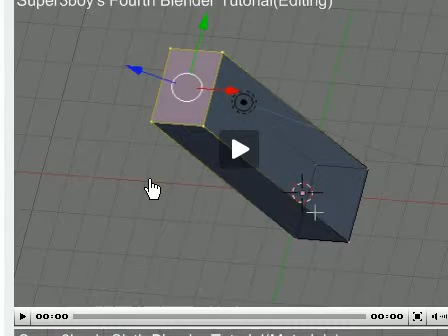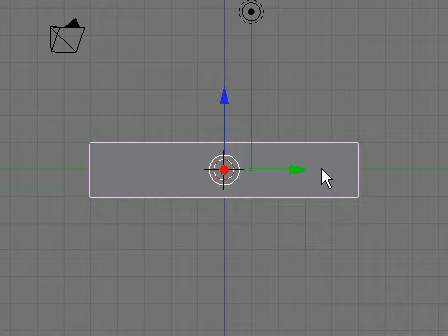So let's go ahead and have fun with some armatures. Here I am in the Blender 3D software, and we're actually going to use our default cube today. What we're going to do is go View, Side, or Numpad 3, hit the S key, hit Y, then 5, scaling this 5 times its size on the Y axis. Now we have a nice little long rectangular thing here.

We go down and want to get in the middle to the left of it. Click right about there, hit Shift S, and you can snap things to locations like cursor to grid, which is what we're going to do to make everything more exact. Hit space, add mesh, space, add armature, and you can see a little tiny thing pop up on the side here. We're going to go into wireframe mode by hitting the Z key to make everything a little easier to see.

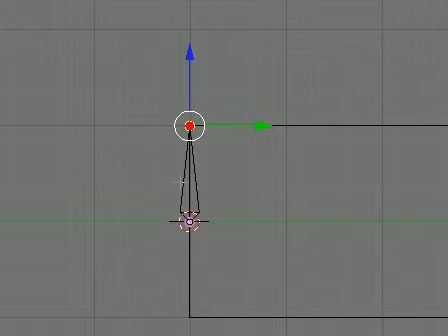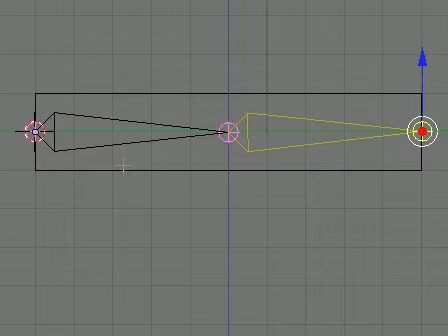Then you hit the G key, and we're going to move it to this blue line, which is the center. We hit the E key to extrude, and get it on the edge of our rectangle here. So what I did was add an armature in edit mode, grab it across, then extrude, so we have two little bones here.

After we do that, we go down to our toolbar and select these options: X-axis mirror, X-ray, and auto IK. Now, auto IK really doesn't matter, but I just like it. It gives it more of an arm feel.

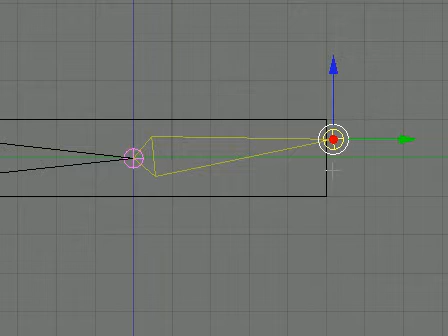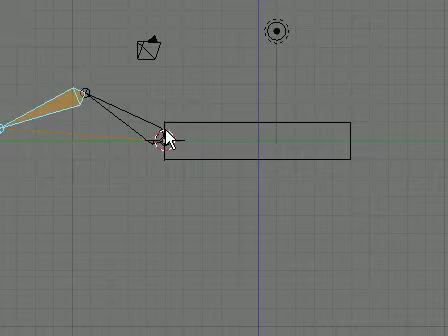If we go down to the different modes and go to pose mode, you can see it gives it a little constraint. It's a bit sporadic now because I'm just trying to keep it in view, but you can see it moves more like an arm when I have it on auto IK. So you can play around with that.

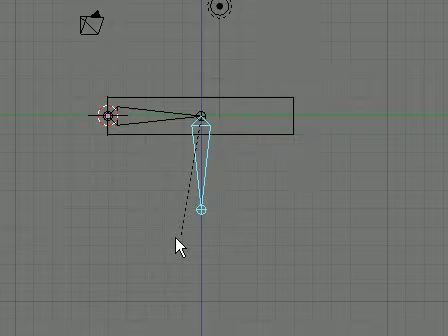If I left click and undo with Control Z, if I undo auto IK and go back into pose mode, it'd just be kind of static. I'm using the G key, you select these like any other objects. After that, I'm going to select auto IK back because I kind of like it for this tutorial.

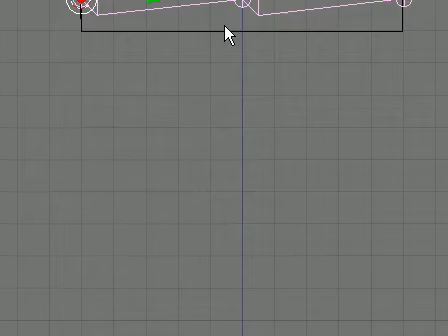Then we go back into edit mode, I hit tab, go to object mode, and hit draw names too, so you can see the names of the things. We're in object mode. We want to select the rectangle here. This is just a cube that we made a little bit bigger, as you can see as I free rotate with Alt.

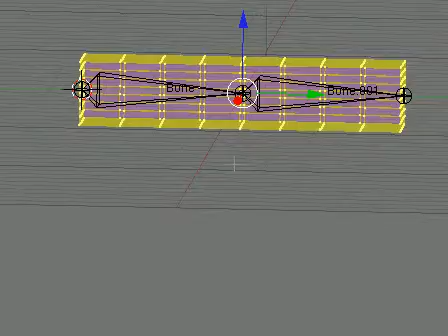Hit W, subdivide it 3 times, I guess that would be good enough. Go back to the side view, and we go down here. We create a vertex group, new, group, set assign. Remember, everything has to be selected - all these vertices - you can select everything with A or deselect with A.

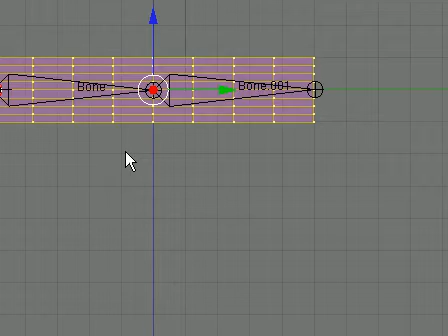So everything's selected, assign. Then from there, we want to go tab, get into object mode, add modifier, armature. Usually the armature is named armature, so that's the object, we just paste it in here so we don't have to spell it out - I might spell it wrong, I'm a bad speller. Then the vertex group we just created is called group, so we simply call it group, and deselect envelopes.

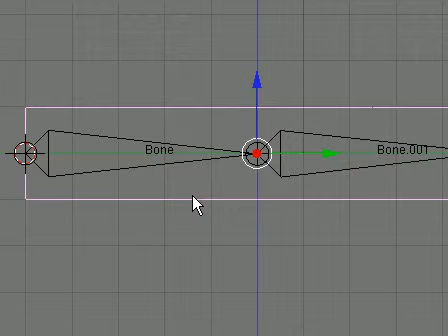Now, the last thing we have to do is take this rectangle here and make sure that's selected with the click, then shift, right mouse button again to select those two. Control P, make parent to, name groups.

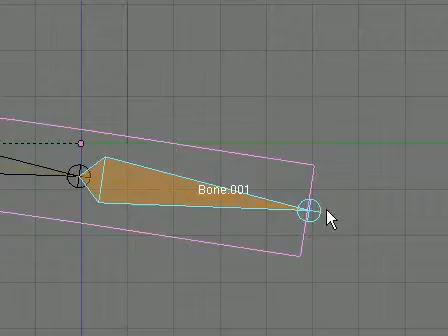Now, if we go into pose mode here, check this out, see how it deforms with the little thing here. I'll zoom out so you can actually see what I'm doing. It just kind of deforms there with a little armature. You can add a lot more armatures than what I have here - I just have 2, to keep it nice and simple to explain.

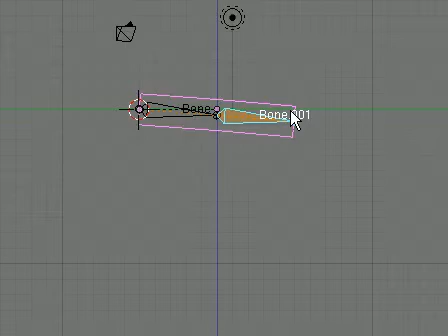You can add more armatures with the extrude, but you have to do that in the beginning process - I don't think you can just change it. I'm going to left click there, auto IK, and I'm just hitting the G key, and that's without the auto IK, so you can see the difference there.

I went a little fast on this tutorial because I only have 10 minutes and there was a lot to cover, but those are just the basics of armatures. They're used to basically provide a skeletal structure for characters or objects. So if you were making a character, you would want to rig them so you could pose them different ways. If you want to get more into this, I'd suggest my Super3boy making a character in Blender DVD, which is coming out in about a month or so.

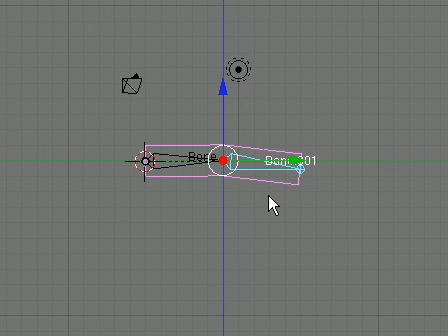So I hope you learned how to do armatures in this tutorial. Just play around with it, get used to it. You might have to replay this tutorial a couple times, it's a pretty hard concept. So just have fun with it, and I'll see you guys in the next tutorial.